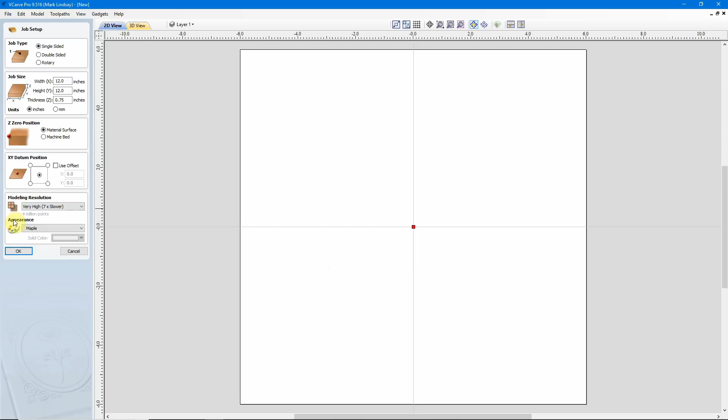And we'll get started. So once again, I'm going to be using models that are provided in the 3D Clipart that comes with VCarve and Aspire. This time I want to combine a couple of models. So we'll go up here to our Clipart folder, and again I'm going to look for a dome/dish.

Except this time I think I want one with a flat bottom. So I'm going to choose this one here, this circle, and again to put it in the center of my material out here, I'll just come over here and double click it.

Okay, so when you're combining models, it's best to get the first model, the model that's going to be on the bottom, set and ready to go first. Then we can come back and add more models to our project out here.

So with my model already in move and transform mode out here in the center of my material, let's go ahead and resize it. Again, I want about a 10-inch diameter circle out here.

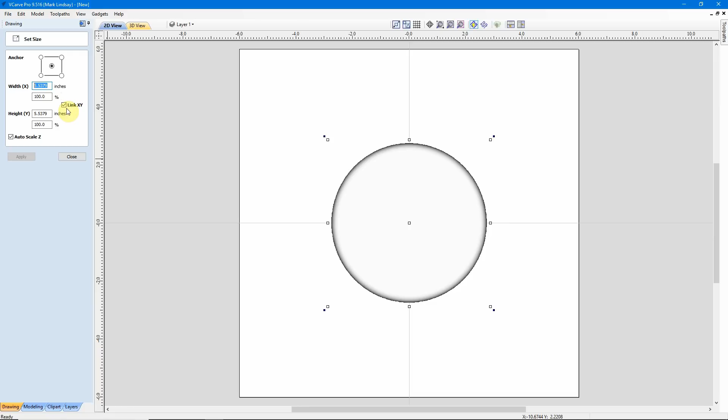So I'll make sure I have link XY checked here. Then I can choose either one, it doesn't matter because it's linked. I'll select my width in X and I'll enter 10.0. Click apply, and our model resizes out here. We can go ahead and close that.

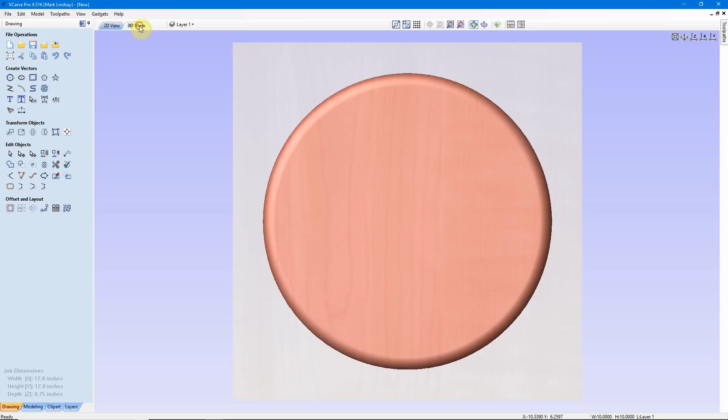Now again, if we come over here in the 3D view and take a look, we have a dome. So we need to go back and change that.

So we'll go over here into my 2D view, making sure the model is selected. We'll come down here to the modeling tab. And again, I have flat round circle, and the combine mode you see is set upwards. We need to change that.

So I can double click on the name of this model down here, or I can come up and click on this wrench. Either one will do. And that gives me the properties of this model. So what we're going to do here is we're going to set this as our base. I'll go ahead and select the subtract combine, and if you notice, it turned almost all of the model black out here.

Before it was white and just black around the edges, and you see the gradient here. It starts out black and then comes up lighter and lighter until it gets to white. That is showing you the black is the deepest cut it's going to make. The white is the shallowest cut. Well, when we change that over to subtraction instead of addition, it does just the opposite. We have black here, meaning this is going to be the deepest part of the cut, and we go gradually lighter until we get out here, and this will be the shallowest edge of the cut.

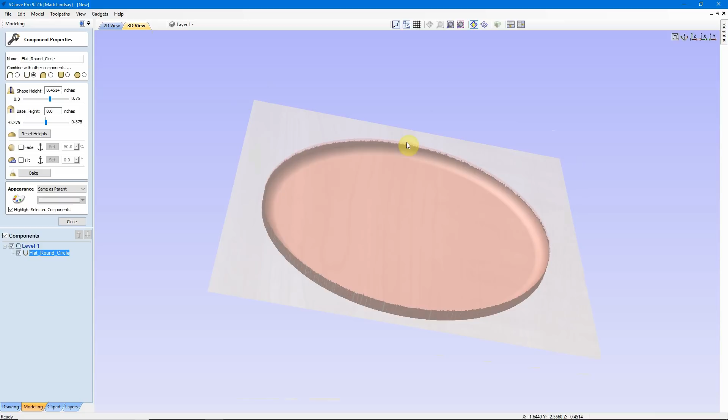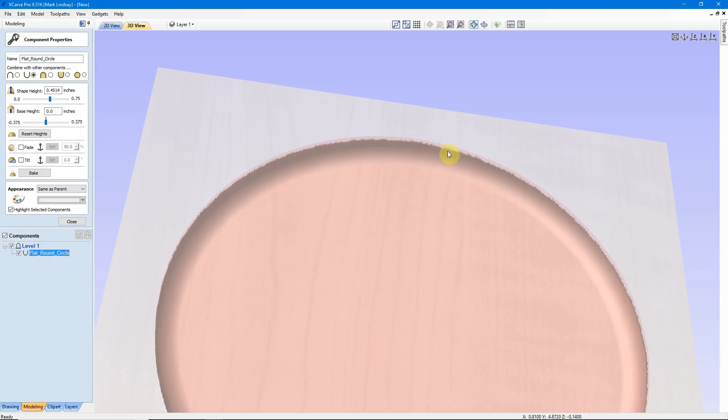Now, I had a couple of questions based on the last video asking about the zero plane. If we zoom in here on our model, take a look, we can see we've got some pretty rough edges in the model itself. If we don't use a zero plane, those rough edges will be carved into the material. If you've been having problems with chip out or big lines around your models, that could be a factor. The zero plane eliminates that. But I'll get into that a little further in a minute.

As we have it set right now, if we look down here at the XYZ display, this model is going to cut 0.4514 deep. That's a little bit deep for me. I want to bring that down to about 3/8 of an inch. My material is 3/4 of an inch. I want to bring it down to about half of that depth.

So we'll go up here in the shape height and enter 0.375. You see it adjusted the model. We come here and look, it's a little bit shallower. I run my cursor out here and look down at my XYZ display and see it's now

carving 3/8 of an inch deep. We still have that roughness around the edge, but the zero plane will take care of that. Before we do a zero plane, we have a couple of other things we want to add to this project, so we can go ahead and close this. I'd like to give this as a wedding gift. So what we'll do is import another model right here into the center.

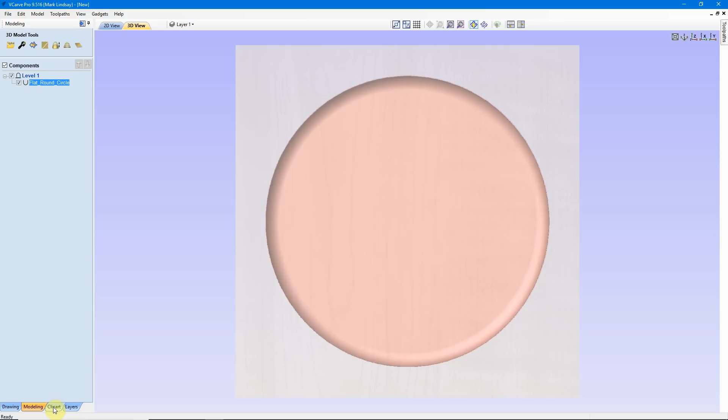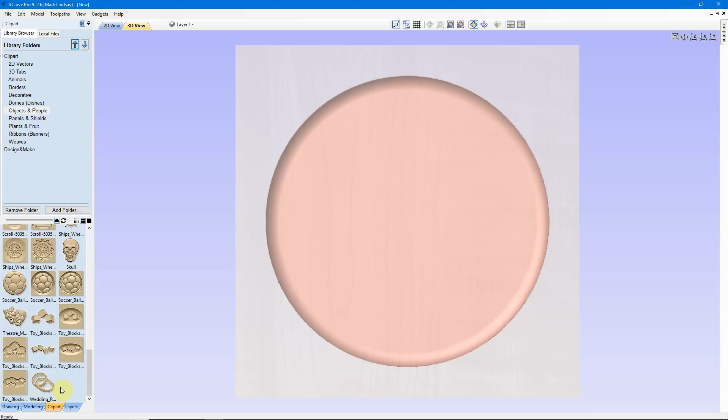So we'll go back to our Clipart, and I'm going to jump down here to Objects and People. We'll just scroll down the list of models till I come across the wedding rings, and I think that would look good carved into the center of this. So again, I'll double click to put those rings in the center.

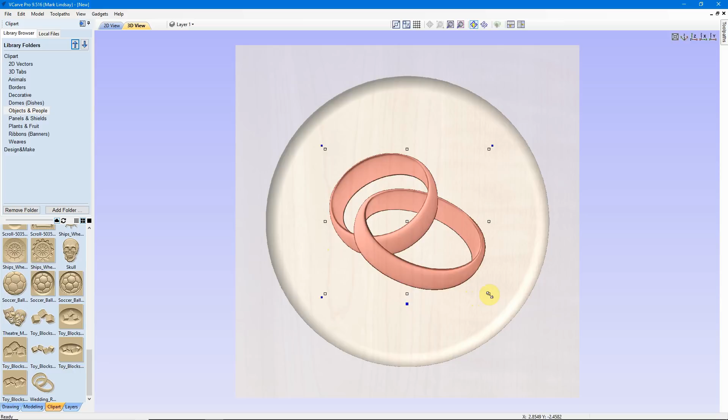If I'm on that, it may be a little bit small, so since we're automatically in move and transform mode, I'm going to bring my cursor over to one of these corner boxes and hold down Shift to lock that model in the center of my material. Just kind of drag it out a little bit, make it a little bigger here. I think that's about enough. I think that looks much better.

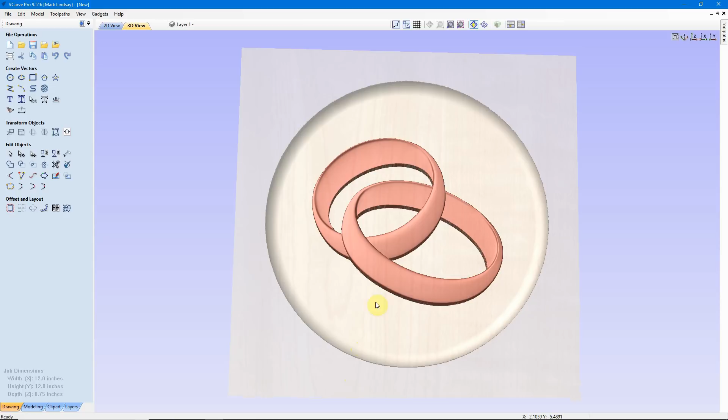So I'm finished with my modeling or Clipart tab. I can go back over here and we'll take a look and see what we've got. We can see here our 3D model for the dish sits below, carving into the top of this piece of material. But if we come up here and look at this in X or Y, I'll go ahead and do a straight on X shot. We can see that these wedding rings stand proud of the material.

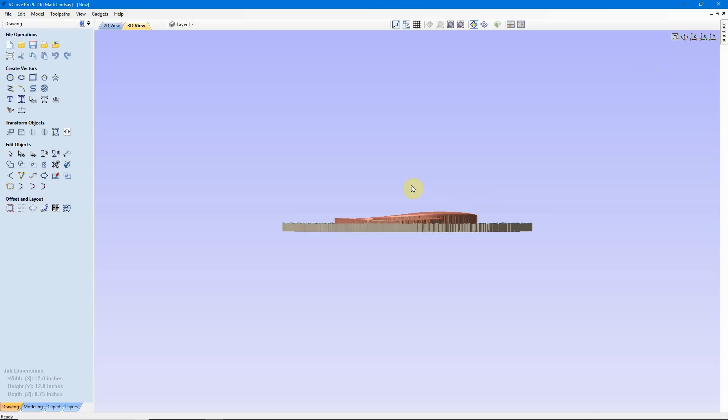That's not going to work at all. So we're going to need to change the properties on this model completely. With it selected, we'll go back into the modeling tab, and we see now on level 1 we have added the wedding rings along with the flat round circle. Let's open up the properties on the wedding rings by double clicking it. Now in this case we do want the combine mode to be addition.

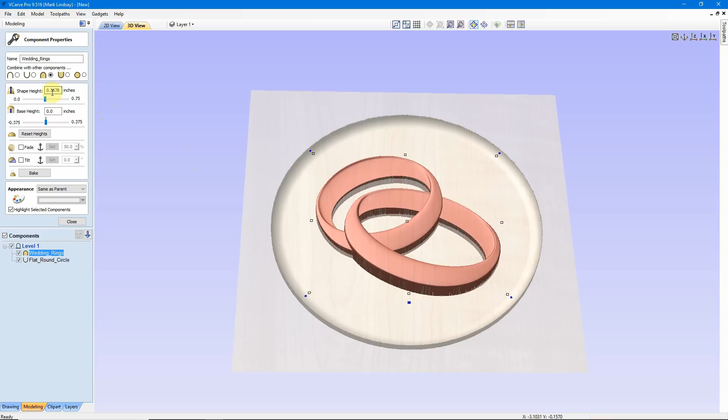We want these wedding rings to stand proud of our dish, we just don't want them to stand that proud. So we can see right here that we have a shape height of 0.3678. That is from this edge here—let me zoom in a bit—from this edge here where the straight vertical meets the top of the model, that's how thick this is. This straight edge and everything below it is the base of the model, and this is the relief of the model.

So the shape height is this portion up here above. That's a little bit much. Our base height is a little bit much as well. What I'm going to do is reduce this a little bit. Let's take it down to about 1/8 of an inch and see how that looks. So we'll take 1, 2, 5, and let it update. That brings that down quite a bit,

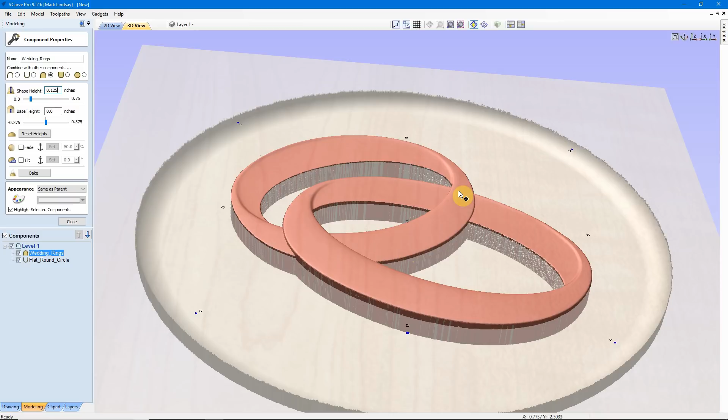but our base is still a little bit high. I don't want this tall base standing up before we get to the actual contour of the model. I want to get rid of quite a bit of that. So I have two ways of doing that. One, I can enter a number up here in base height if I know it, or I can adjust the slider. Now, this slider moving to the right will give us positive numbers, which will raise the model up, but I don't want to do that. So I'm going to have to go into negative numbers here and bring that base height down.

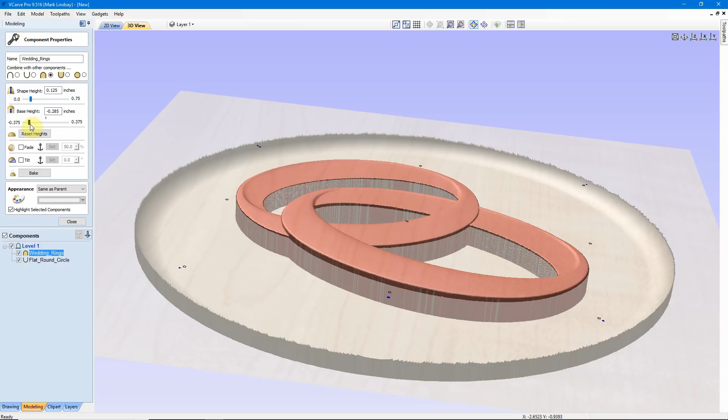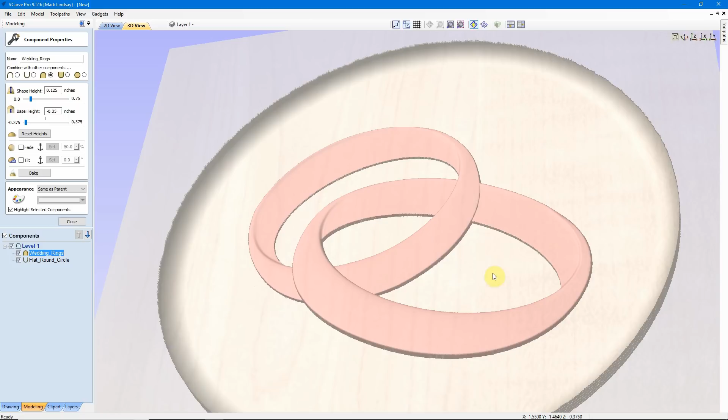So let's see what happens when we move it down to about 0.3. Take a look at that, and that brings it down some. It's now below the level of the surface of our model here, but I still have quite a bit of a ridge. So we've tried -0.3, let's try -0.35. Let it update, see what we get there. That's a... whoops, didn't mean to move it. Control Z. There, that's a little bit better. Let's see what happens if we take it all the way down to 0.375. Let it update.

Looking at it from this direction, we do have a little bit of a ridge here, but since this ring is supposed to be laying on top of this one, that actually doesn't look bad. The lowest ring, we still have some relief here, but not a huge amount. So I think that'll work.

We'll go ahead and reduce our base height to -0.375. I'll leave the shape height at 0.125. What all this means is the start of the contours of the model will start at the surface of the dish model, and the relief, the height of the model at its highest point, will be about 1/8 of an inch above.

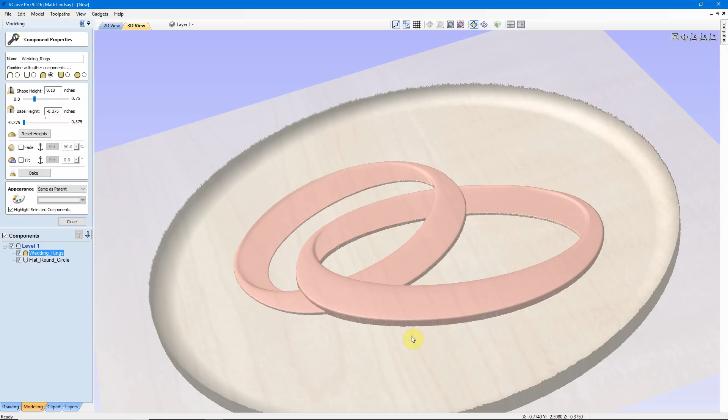Now, with this recess down inside this model, we can bring this up if we like and see how that looks. And I don't know that I like that. I don't know, just personal taste. I think I prefer it back down at 1/8 of an inch. So I'm going to use that just for me.

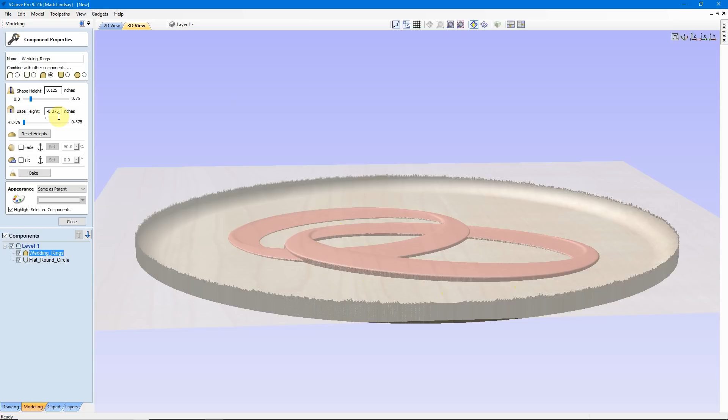Again, this is one of those subjective things. If you want more depth, more contour on the rings, then by all means adjust that shape height right here. I'll go ahead and close this.

Now let's take a look at what we have here in 3D, and I'll give you a brief recap. What we did was we imported a dome/dish. We got into the properties. We set it as a dish to carve down into the material.

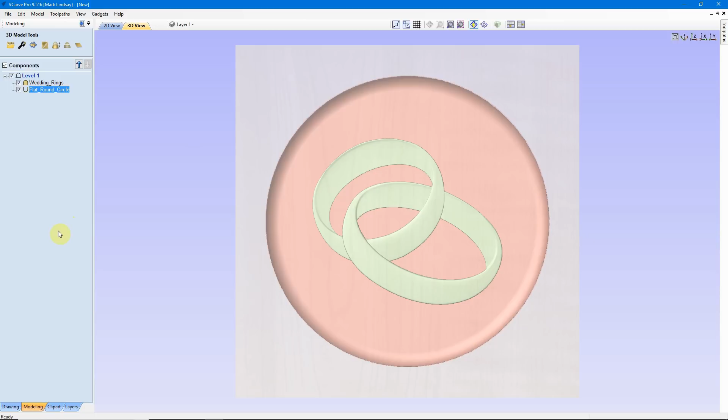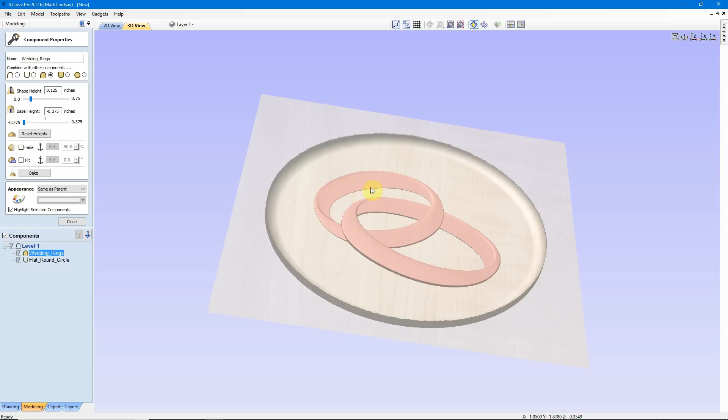Then we imported the wedding rings. We adjusted our base height to where the relief of the model starts right here at the level of this dish. Then we adjusted the relief height to give us what we're looking for here - enough contour to make it stand out, but not so much that it looks like it's projecting out from the wall. So we can go ahead and close this.

Before I go any further, I'm going to go ahead and calculate a toolpath to show you what this looks like without a zero plane, because again, we still have this roughness here that came modeled in with this dish model.

So what I'll do is I'll come over here and just do a 3D finishing toolpath. I'm going to do it real quick with a 1/4 inch ball nose bit. Do the model boundary, calculate, and I'm just doing this to be fast so that we don't spend a lot of time waiting for this to calculate.

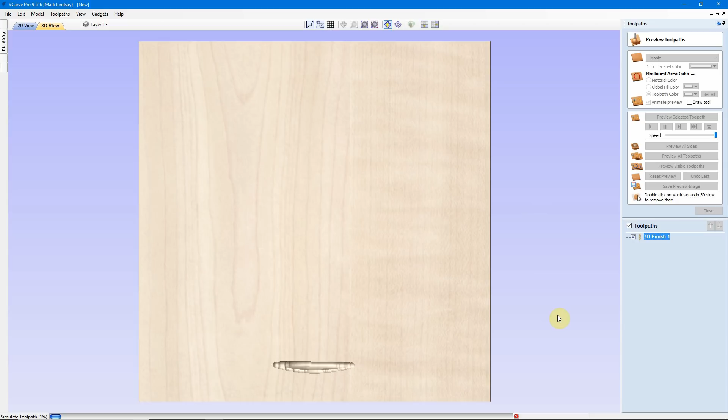And I'll preview that toolpath. And already, even though it's just beginning, you can see what I mean about the roughness of that model and how it's going to carve along the edges. And that's simply because VCarve does not have a reference as to where this model is supposed to start.

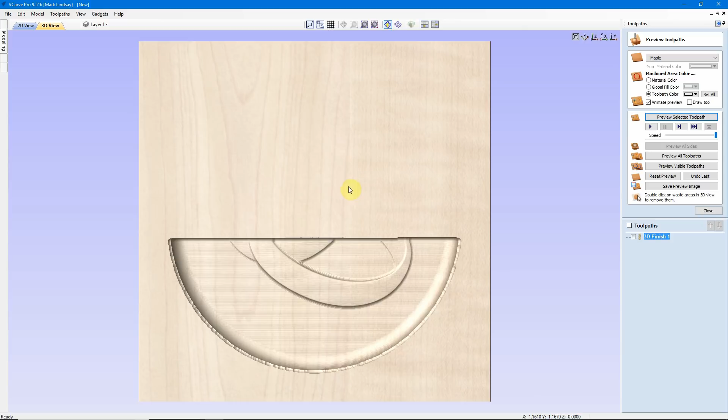Now, in a situation like this where I don't want to continue watching the preview, I can stop the preview by coming down here to the bottom of my screen and hitting this red X right here. That stops the preview. I don't have to wait for this to go ahead and finish to do what I want to do next.

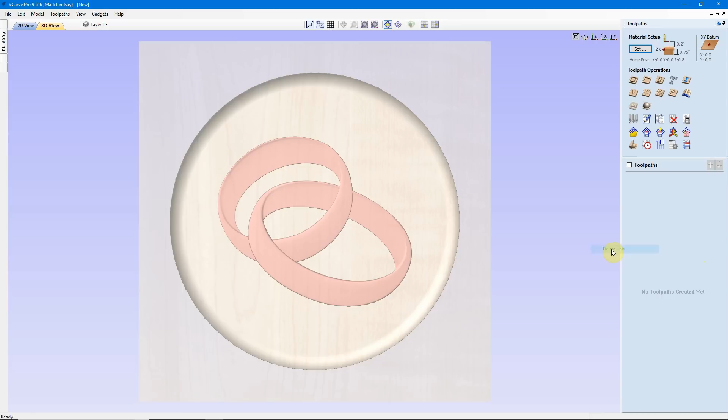I don't like this. I need to get rid of this. So what I'll do is reset my preview, close my preview window, and I'm going to delete that toolpath entirely by right-clicking, selecting delete, and then selecting delete this. That eliminates that toolpath.

So, as you've guessed, we still have some work to do out here. Looking at my 2D view now, I have both models placed exactly where I want them. But what I want to do now is add that zero plane. So we'll add the zero plane.

We don't see any difference here, but if we go into the 3D view, now is when we do see the difference. What adding that zero plane did was fill in where the model stops. It filled it into the surface of our material.

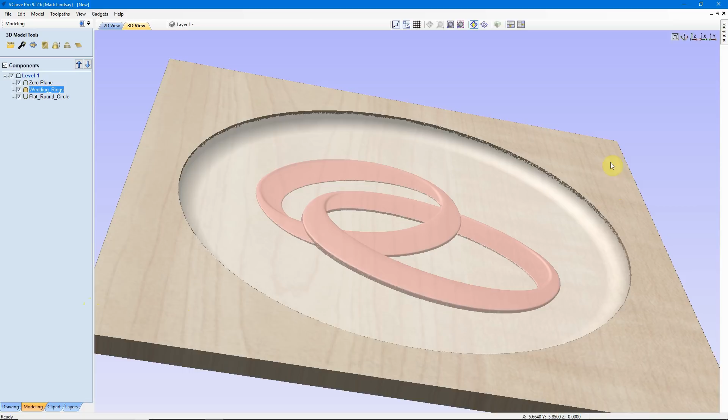Now, one side effect of this, if you noticed in the first video in this series, is it makes the entire surface our 3D model. And I'll explain that a little bit further when we get into calculating toolpaths for this.

What we have now is our zero plane, our wedding rings, and our flat round circle. They're all placed, and we could carve this as is. But I think we need something, I think we need a little bit more.

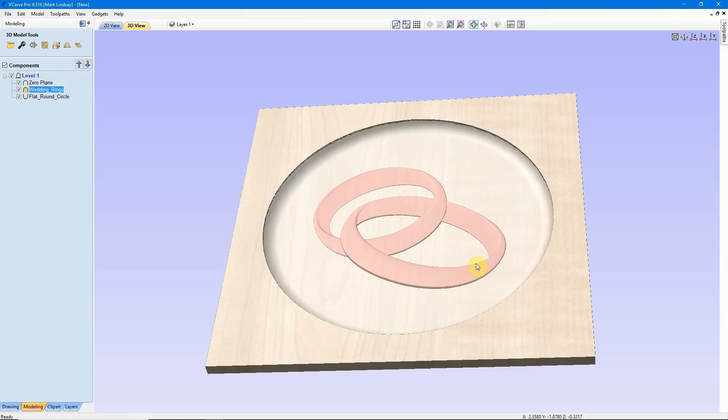So, go ahead and go back to a straight Z view. I'll go back into my 2D view, and I'll go back into my drawing tab. Now I'm going to click off out here just to deselect everything, and you see how everything kind of went grayish. I want to put a vector around this dish to base an offset on.

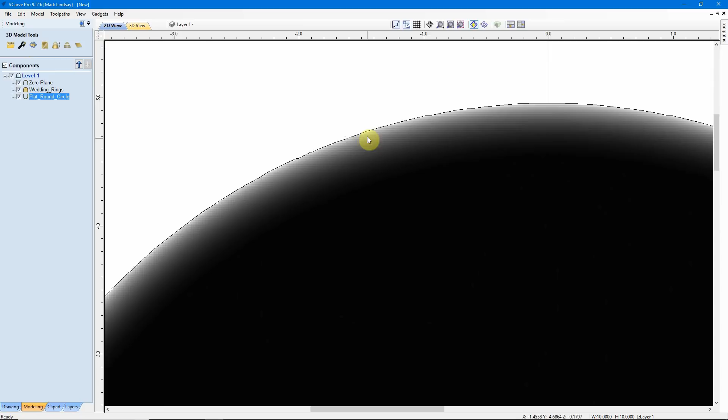I want to offset out away from this model to give me a vector to cut as a profile. There's a simple way of doing this. I'll select this model, go back over into my modeling tab, and come up here to the third icon on the left, which is create a vector boundary around the selected component. I'll click that icon, and if we zoom in here, we now see there is a vector around the model that I can select. I can go back over to my drawing tab, and if I wanted to just cut flush around the model, that's the vector I would use for my profile toolpath.

Well, I want a little bit of a lip out here. I want a rim. I don't want that sharp jagged edge where that dish would end if I just cut right here along this vector. So, with that vector selected, I'm going to offset. I'll come over here and click offset.

I want to offset it outwards, and I want a rim out here. Let's go with a 3/8 of an inch wide rim. So I'll offset outwards 0.375. I don't have any sharp offset corners to worry about, so it doesn't matter if there's a check mark in there or not. I don't want to delete the original, and I don't want to select the new vector, I just want to create the new vector. There it is when I click offset. There's our new vector.

Now I'll close that. Now I want to do something else. I want to put some text in here - the names of the bride and groom up here and the date of their wedding down here. And I want it to curve, I want the text to follow a curve. Probably the first thing I want to do is create the curves I want the text to follow, simply because it'll be easier without the text here in the way.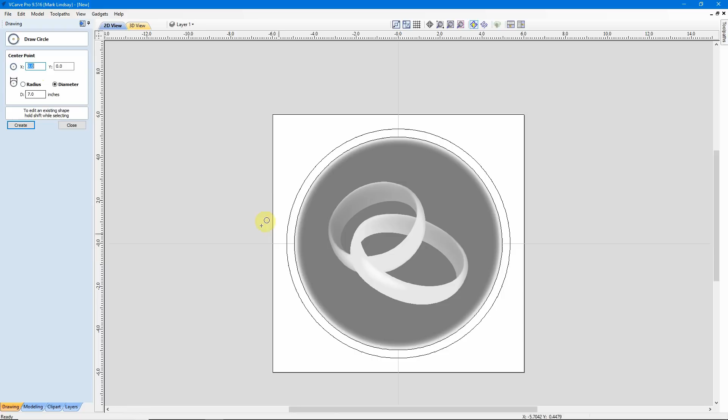So, without selecting anything, I'll click off and come over here under Create Vectors to draw a circle. Now I want the center point of that circle to be at my x0, y0. And I already have a diameter of 7 inches here on a 10-inch dish. Let's create it and see what it looks like. Okay, that kind of blends in there.

Let's make that a little bit bigger. So I will hit Control Z to undo that circle, and we'll make it 7.5 inches in diameter. Click Create. And now my circle doesn't lay over the rings, either one of them. So I think I'll go with that.

I'll close that. Now I want to split this circle into 2 arcs, one going this way, one going this way. So I'll click on the circle, and then go into node editing mode by typing the letter N on my keyboard. That takes us into node editing, and we see that this circle is made up of 4 arcs.

I'm going to bring my cursor over this point right here, right click, and select Cut Vector. But before I do, we look over here and see the letter C - that's the keyboard shortcut to cut vectors. So I'll select this one now since I have the menu open, and we'll see the start point change to that point right there. Remember, green is the start point, black is just any other point.

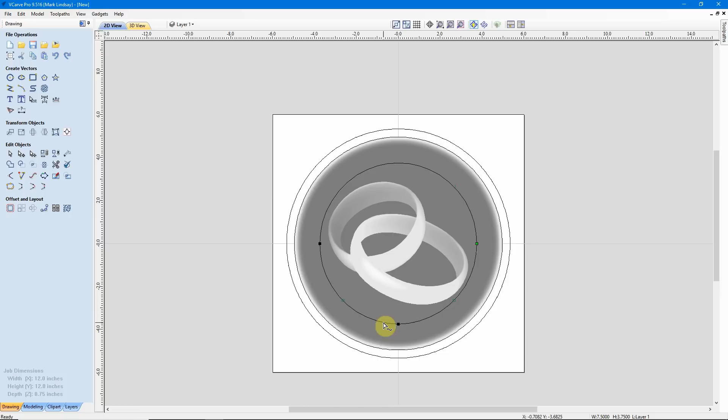Now I want to cut the vector over here, and since I know the keyboard shortcut, I can just put my cursor over that point, and when it turns into the crosshairs, type the letter C, and the vector is cut. So now I have these 3 points showing me this arc up here. I can come down here and click on this, and I have these 3 points showing me that this arc is separate from this one. So I now have 2 open vectors. Click off to deselect, right click to come out of node editing mode.

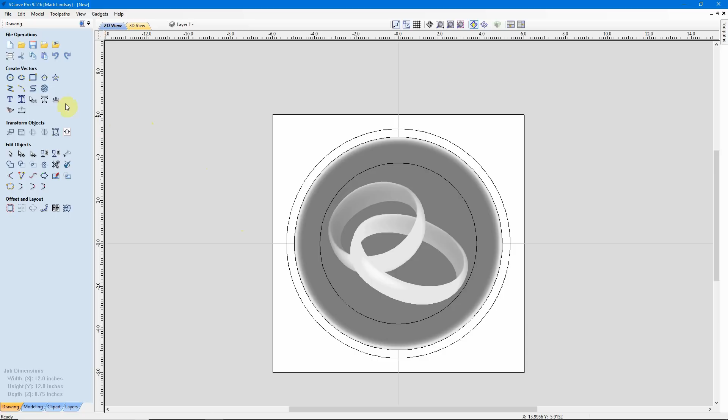Now I'm ready to add some text. So we'll go up here to my text window and click on that icon. Give it a second to load the fonts. I'm going to go a little traditional, I'm going to stick with my Times New Roman. I'll figure out my text height in a minute. It doesn't really matter where out here it's going to place the text because I'm going to be moving it.

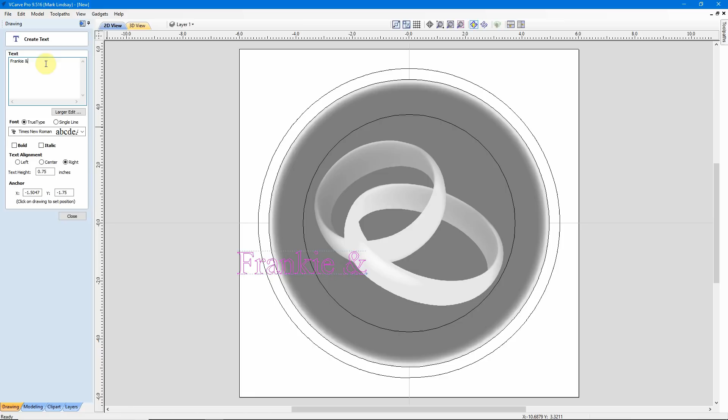So we'll go ahead and come up here and enter the names, which are Frankie and Johnny. The right people will get that. And I'll close it.

Now I can click again my text to bring it into move and transform mode, and I'm going to grab it by the center block here and move it up and line that center block. You see how it snaps to the middle, and I want to put it right there on that intersection. So my text is now snapped right there to the center of that arc.

So now I can click off. Then again select my text, hold down Shift and select this arc. Select the arc last. Then I'll come over here under Create Vectors to this icon right here, wrap text along a curve. I'll click that icon and we have a couple of problems.

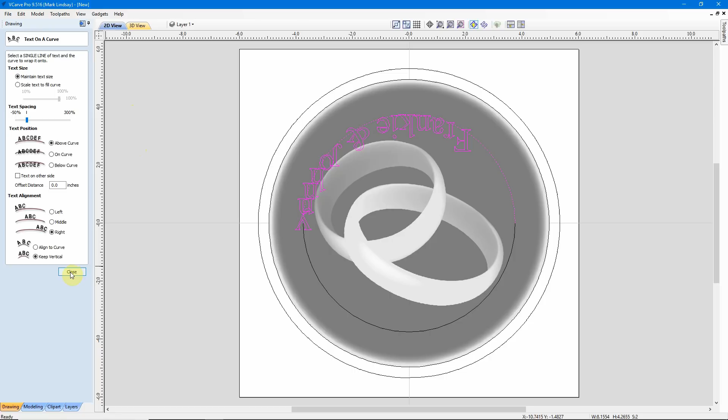So let me close that, do Control Z to undo that, and I'll show you why this flipped upside down and reversed. That has to do with the vector start point of this arc.

With that arc selected, again I'll type N on my keyboard to go into node editing, and we see the vector start point is over here. We read and write left to right, not right to left. So I'll want my start point to be over here. The text is going to follow this arc based on the start point. So I'll convert this, right click, make start point.

That changes green. While I have this open, let's check the bottom one. It's the same way. So I'll go ahead and hover over this, right click, make start point. So now both of these arcs are running from left to right.

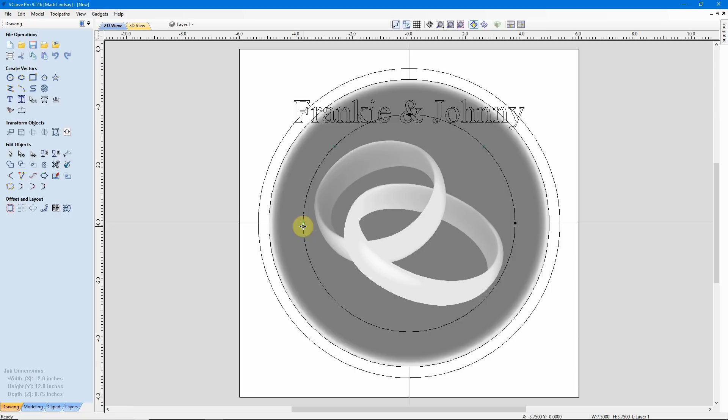Click off, and then right click to get out of node editing mode. Now I can select my text, hold down Shift, select the arc, come back over here to apply text on a curve, click it, and we stay oriented the correct way.

Now we have some decisions to make here. I don't really like how this is sitting. So I'll go ahead and maintain the text size, but first of all we need to do some placing here. I want the text to be aligned to the center of that arc. So I'll click middle, and that places it there.

I don't really like the letters staying vertical, so I'll come down here and click Align to Curve. That adjusts that much nicer.

It's sitting on top of this vector, on top of our arc. Now we can position it above the curve where it is now, we can place it on the curve, or we can place it below the curve. Let's take a look at what happens if we place it on the curve. And that's going to put some of my lettering down here in the ring, and I don't want that. So let's go above the curve.

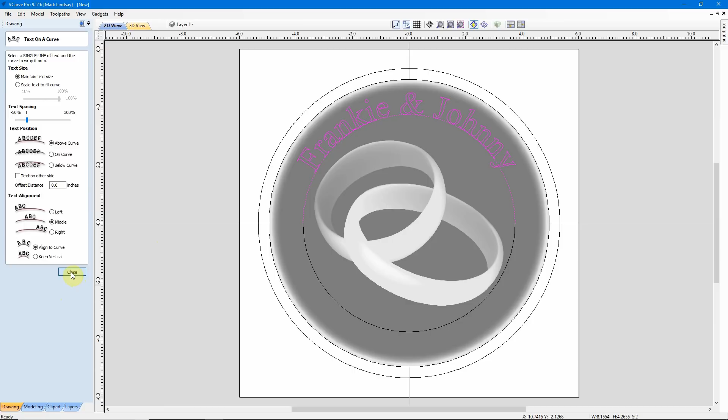Maybe we'll revisit this, maybe we won't. But we're going to leave that as is right now until we get the date here, then we can make adjustments. We'll close that, click off to deselect.

Now I want to get the date entered down below, so I'll go back to my text window and I'll type March 21st, next year, 2020. That'll work. We got advance notice.

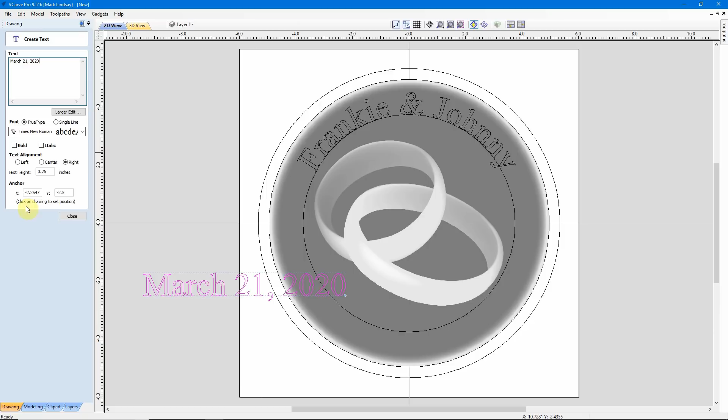Again, I'm going to leave all this alone because it doesn't really matter yet. We'll just close it. And then it's already selected, so I'll click it again to bring me into move and transform mode. Grab the center of my text, drag it down here and snap it to that intersection.

Now I can click off, select the text, hold down Shift, select the arc, and it's important to do it in that order because the apply text to a curve applies the text to the last curve you click, the last vector you select. So we'll apply text to a curve, and again we have to go back through and make those adjustments.

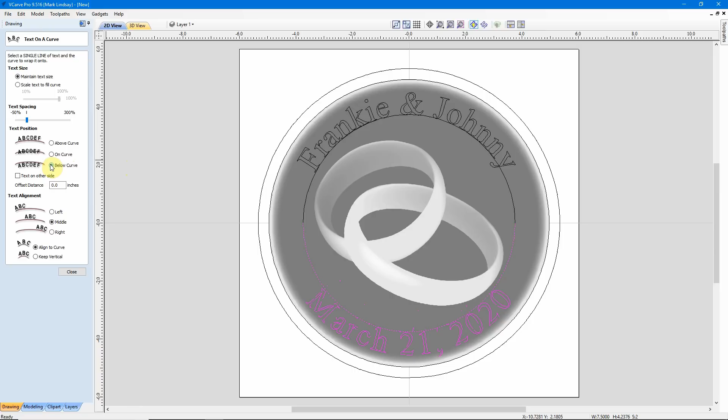We want to align the text to the center of that arc. I want to align it to the curve, but this one is placed so far up there we are into the rings way too much. Let's look at below the curve, and that brings it out here quite a bit. We're kind of getting into a little bit of the slope that may be too much, but we'll take a look at it and see what it looks like.

I certainly don't want to do it on the curve because that's going to engrave again in those rings. So we'll look at below the curve. We'll go ahead and close, deselect everything.

With our text placed, we no longer need these two vectors here. So we can go ahead and select them both, delete. Now we're free to adjust these should we want to.

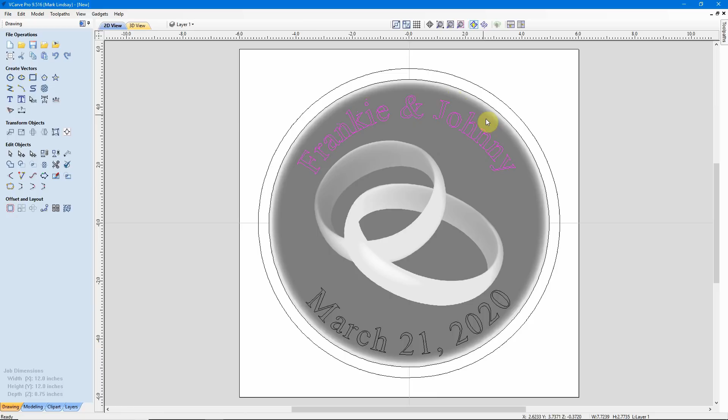If I want to move these down just slightly, I can just select them and then using my cursor down button on the keyboard, kind of nudge it a little bit to bring it out of our 3D carve area up here. And it's the same thing with this. I can select it and using the cursor up button on my keyboard, I can nudge it up just slightly.

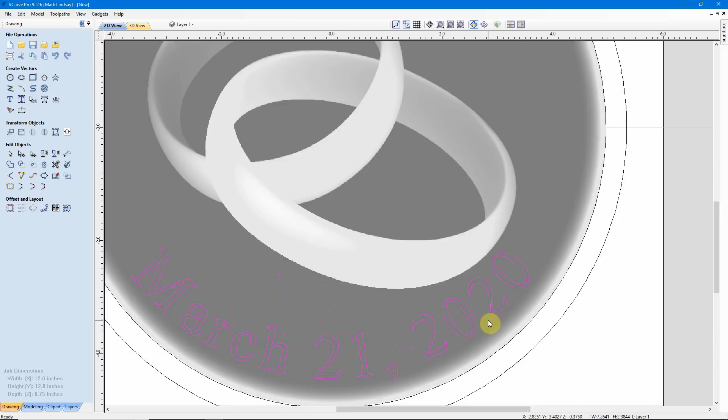I think that may be a little much, so let me zoom in a little bit. Yeah, I think that'll work. I'll go ahead and leave it at that.

Click off to deselect everything. Now we need to take the time to go back and look at our text and see if we need to make any more adjustments. As I look at this, I think the N and the K are just a little bit too close together, and when we try to carve this, they're going to run into one another. So I can adjust the spacing by coming over here to Edit Text Spacing and Curve.

Click on that icon, come back over here between the N and the K. If you look at my cursor now, you see a V with an arrow, then an arrow, then an A. You see which way those arrows are pointing. If I click now, that's going to move those two letters together. If I hold down Shift, you see the arrows change direction. I can click between these two letters to return it to where it was, then click once more to kind of spread them apart a little bit.

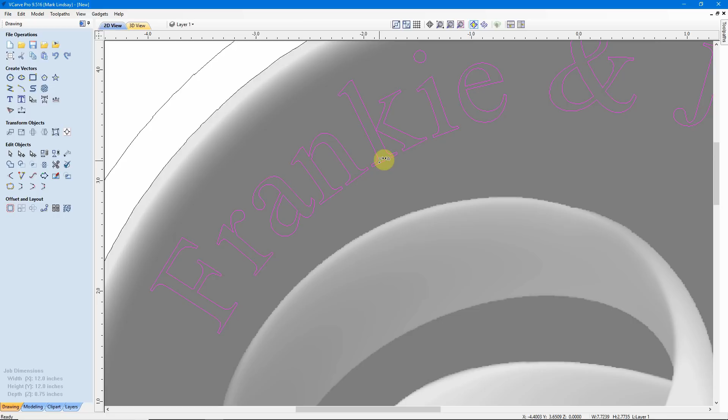I think that will work, that's far enough. This might get a little bit further apart. We'll come back over here and take a look, and these two Ns are a little close together. So I'll hold down Shift, click, come between the N and the H, hold down Shift, click. That separates those letters just enough that the feet here are not going to run into one another, but it all looks like the same word still.

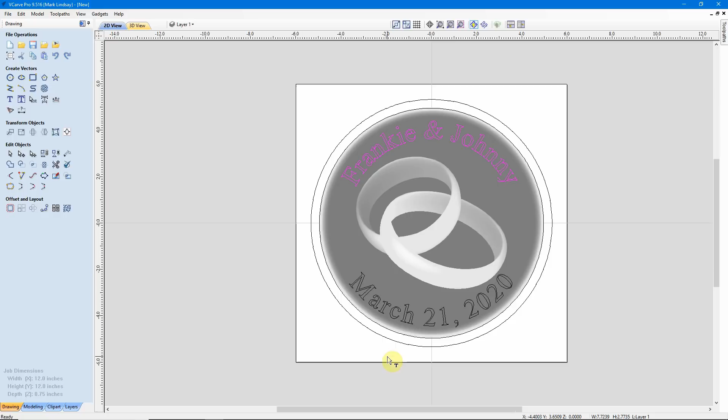So we're good there. Let's take a look down here. We've got plenty of spacing up here between our letters, we're just fine, so I'm not going to bother with that at all. To get out of this mode and back into selection, I'll come over here under Edit Objects to this first icon, go back into selection mode, and that gives me my plain arrow.

So now we're ready to start calculating toolpaths. We've got a pretty complex design here. We've got our dome, which we changed over to a dish. We have the rings that are going to be left in relief, carved on the bottom of that dish. We've got text to apply to that dish. Then we have our profile out here so we can cut it free of the rest of our material. So let's start calculating some toolpaths.

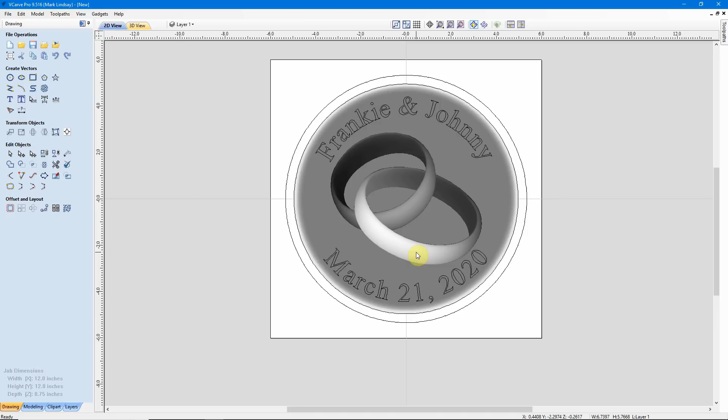The first thing I'm going to do is select the rings, hold down Shift, select the dish. Go over here to our Toolpath tab, and again I'm going to use a roughing toolpath with a 1/4 inch ball nose.

I'm going to select the model boundary, and remember what's going to happen is it's going to change — that zero plane changes so the entire piece of material is now the model boundary. I'm not going to use a boundary offset for this, it's just not necessary. If I apply a boundary offset, it would make my ball nose run 1/4 inch past the edge of my material, and I don't need it to do that because I'm cutting it out.

I'm going to leave a machining allowance of 25 thousandths of an inch. I had a question on my previous video about why, on my roughing toolpath, did the Z come down and just cut to a certain level, drop a little more, cut to a certain level, drop a little more, and cut to a certain level. That's because I was using the Z level roughing strategy.

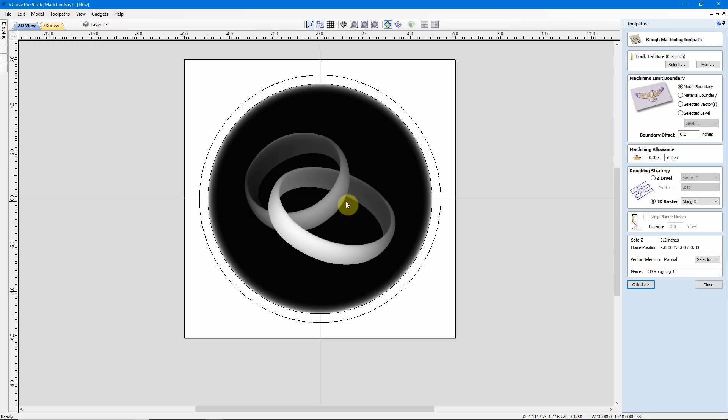The choice between 3D raster and Z level is your choice to make. As I demonstrated in the previous video, the Z level roughing strategy — the bit will drop down to a certain point, machine away the entire area, leaving only the areas behind that the finishing toolpath will clean up. Then drop to the next level, do the same. Drop to the next level, do the same. With 3D raster, the Z will plunge down as deep as it needs on each pass to leave that 25 thousandths machining allowance.

If you have a long enough cutting area on your bit, 3D raster may help. If you don't, use Z level. We're going to come on down here and call this 3D Roughing 1. We'll just leave that name. Now calculate.

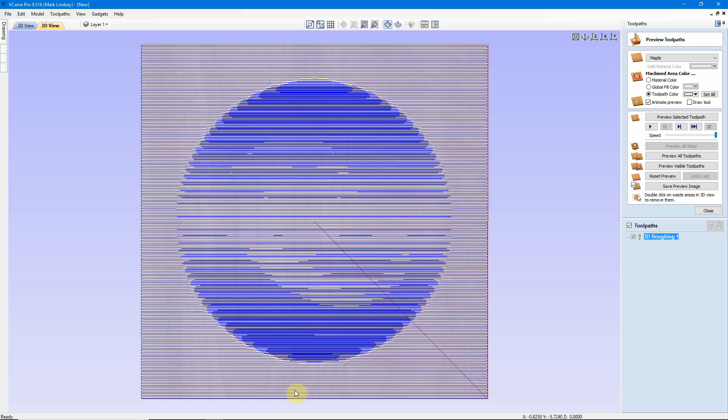Because I'm using that lower resolution, it doesn't take as long. As you can see, the zero plane turned the entire piece of material into part of the 3D model. So we'll go ahead and preview this toolpath. We begin to see the rings show up.

You see my step over is pretty wide, which leaves all of those ridges. Most of them will be eliminated with the finishing toolpath.

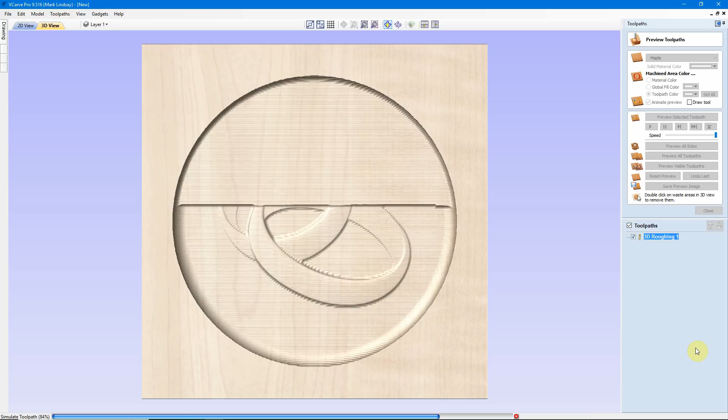The number of passes it's going to take to rough out the entire model is totally dependent on the pass depth that you have set for the bit. You just saw this took 2 passes to clean this out. That's because the pass depth for that bit was not enough to clean out the 0.35 inches that it took to carve this whole thing out. So we have it roughed out.

We'll close our preview and go straight over to 3D finishing. Now I'm going to run this one with an 1/8 inch end mill, and I'm going to look at my step over. My step over is at 40%.

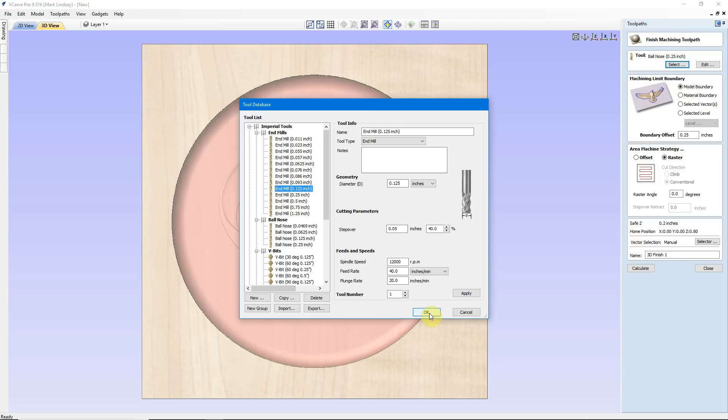I'm going to leave that here in this window, click OK, but immediately go over to Edit, and I'm going to select, enter 9.0%. The reason I want to do that here is because modifying the step over in the Edit window applies that modification to this toolpath only. When I calculate this toolpath, if I want to do something else with that bit, it will be at the previous step over of 40%. It doesn't modify the bit for good, only for this toolpath.

I'm not going to use a boundary offset, 0.0, and I'm going to use a raster strategy with a raster angle of 0, meaning the bit's going to go back and forth with the grain of my material. I'll go ahead and calculate, and this is going to take a little bit to do.

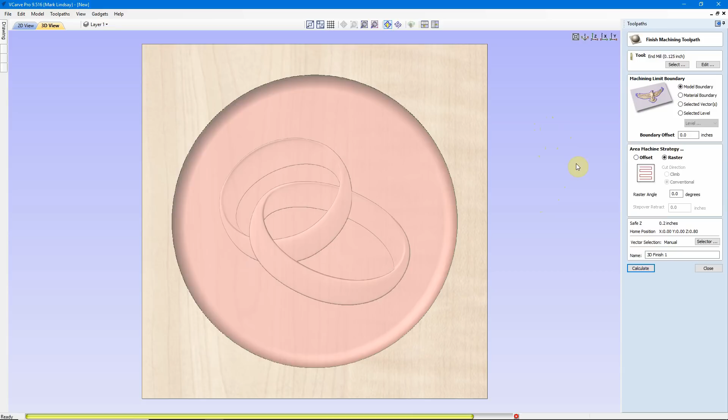We see how long this takes at this resolution. Imagine setting it to 50 times slower. There we go. Now you see how tight that is. That's 100% solid blue. You have to zoom in quite a bit to see the individual passes. At this resolution, you see why 3D carving takes so long.

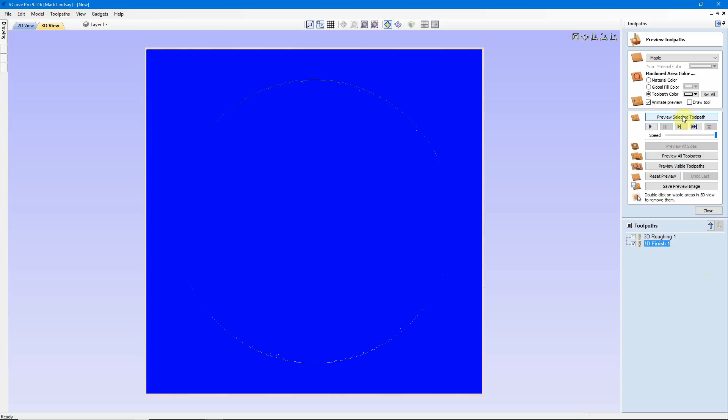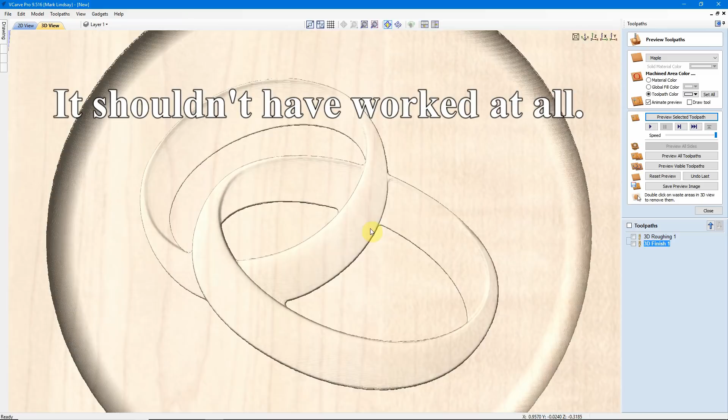So we'll go ahead and preview that toolpath. And there we go. Now we can zoom in and see it cleaned it up fairly well. Maybe a touch of sanding will be needed here and there, but it shouldn't be much at all. And that's at lower resolution.

I like that. I think I'm going to leave it that way. We have those taken care of. Now let's go back into our 2D view. Not only can we not see our text, we can't see anything but those two models. So we'll just click off out here. There's our text. I'll select this text here, hold down Shift, select this text here.

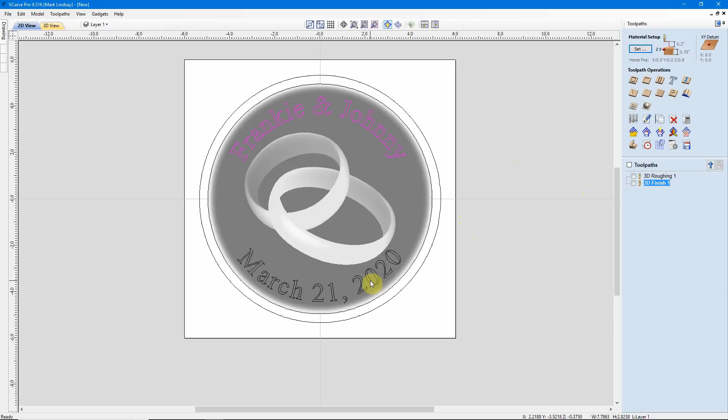And we'll do a VCarve toolpath. The starting depth will be 0. I'm not going to carve to a flat depth. I am going to try it with the 90-degree V-bit and see what it looks like. I can always come back and change it if I don't like it.

Here is the important setting to use, and that is this right down here: Project toolpath onto 3D model. What this does is it projects all of this text down to the bottom of this dish. And if the top of these letters happen to be in any of the carved areas, it will project it down into that carving as well.

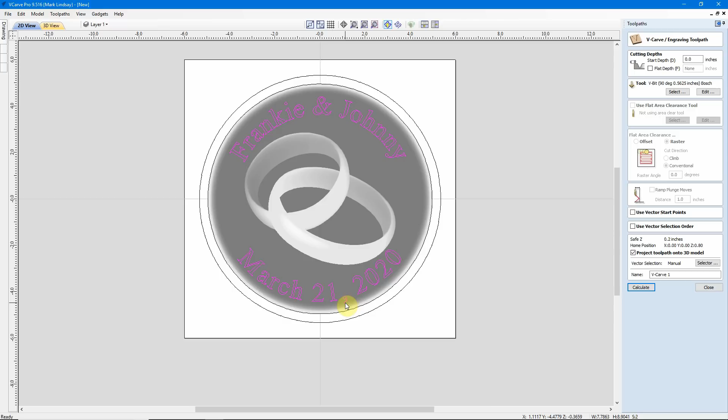Same thing down here, we have the comma. It's going to wrap into that dish a little bit, into that curve of the dish. This will project that toolpath down into the bottom of the model. We'll go ahead and calculate.

It's just a standard VCarve toolpath, so it calculates very quickly. I have it selected. I'm going to change my toolpath color to black so that you can see it. Then I'll preview that toolpath. There we go.

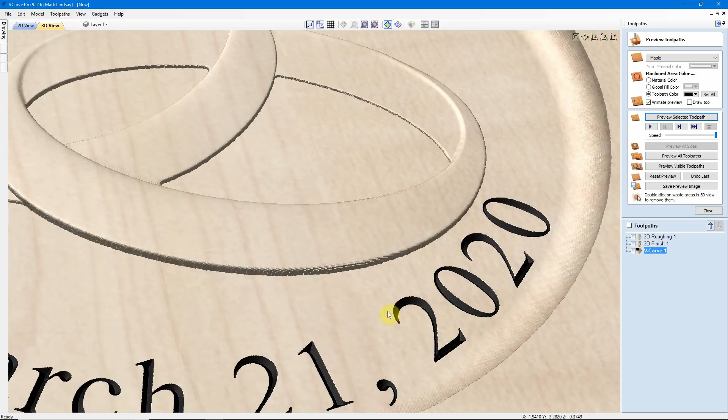If we zoom in, angle it here, drag it back up this way, we can see we got a nice clean carve. I don't think I need to change that to a different bit. I think the size we're using here is just fine.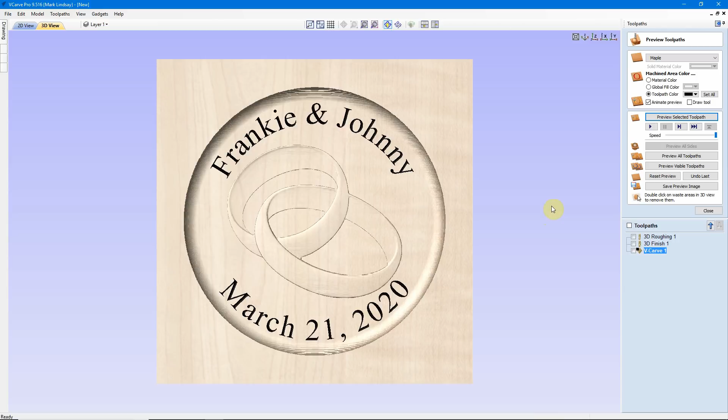So with that done, the last thing we have to do is close this, go into our 2D view, and select our outside profile. For this, we'll just select Profile Toolpath.

My start depth is going to be 0. I want to start carving at the surface. I want it to cut all the way through the material and a little bit beyond to make sure it does get all the way through. So for my cut depth, I'll eliminate everything in that box and type Z plus 0.005, meaning it's going to take the Z thickness I entered in Job Setup and add 0.005 of an inch to it. Then when I press the equals button on my keyboard, I get my cut depth.

The tool I'm going to use is a 1/4 inch end mill. That's okay, 6 passes, that's okay. I want it to cut to the outside of that vector. I am going to do a separate last pass with an allowance of 0.01. I'm not going to add tabs yet, and I'll show you why in a minute. I'm not going to ramp. I have no sharp corners to worry about. I'll go ahead and hit Calculate.

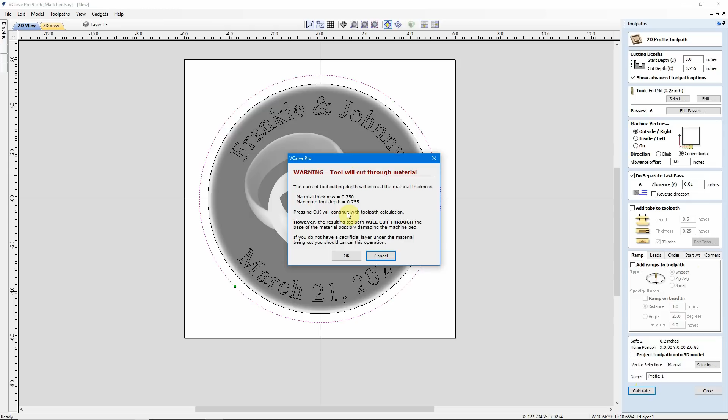You'll notice I'm not projecting the toolpath onto the 3D model. We're cutting outside of the model, so that's not necessary. I'll just calculate the toolpath. It's warning me that the tool will cut through the material — I want it to. Then we'll preview that toolpath.

Now I'm going to change things up, because I'm not really much for this light colored material. I'm going to change it to a medium color. There we go, that looks a little better. And here is the reason why I didn't put tabs in the toolpath.

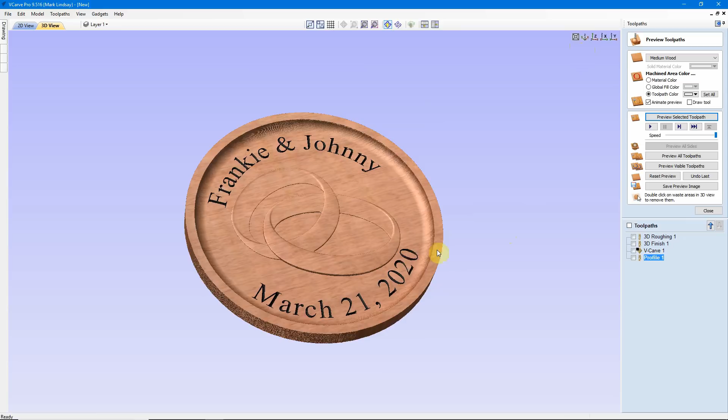I want to be able to double click that waste, then come up here and hit an ortho view of the model, which is the one between Z and full screen here. Just hit the ortho view to rock it back and zoom in a little bit.

Now I can come over here and save a preview image to send to a client or someone else who I need to get approval from on how this is going to look. Then click on Z, get a straight Z view, maybe zoom in a little more, click Save Preview Image and save another image.

When you click on this, it'll open a navigation window. You'll navigate to your folder and save it there. I don't want to save this, which is why I'm not doing that.

Now, the only problem with this is I need to modify the profile toolpath. Because I've done two things, if I do undo last, it's just going to put the material back. That's all well and good, but now I need to modify the profile toolpath to add tabs, and I need to reset the preview for everything. But that's okay, because I've got something else I need to do. I'll close the preview.

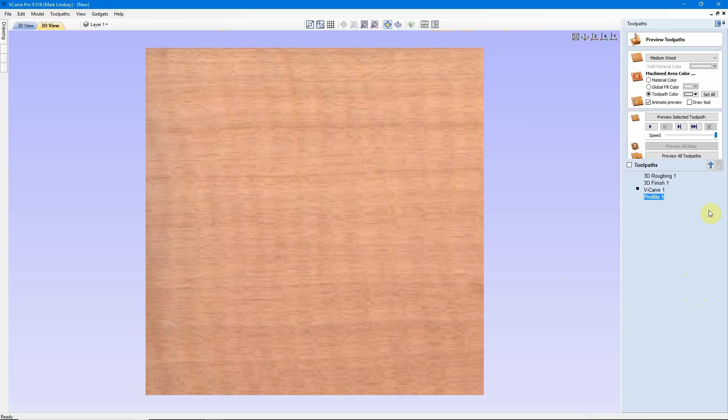When I go outside and work on my CNC machine, I set my X, Y, and Z zeros at the bottom left corner. Now, as I said, for layout purposes, my X, Y, and Z zero is right in the center. If we look back at the 2D view, my XY datum is the center of the material. Now's the time to change that.

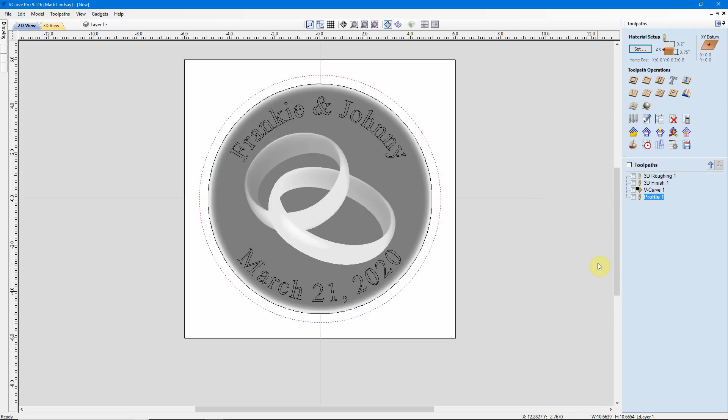I can either go back over to the drawing tab, go into Job Setup and change it, or I can go here to Set under Material Setup and change it right here. I'm not going to do this because I'm also going to change the modeling resolution.

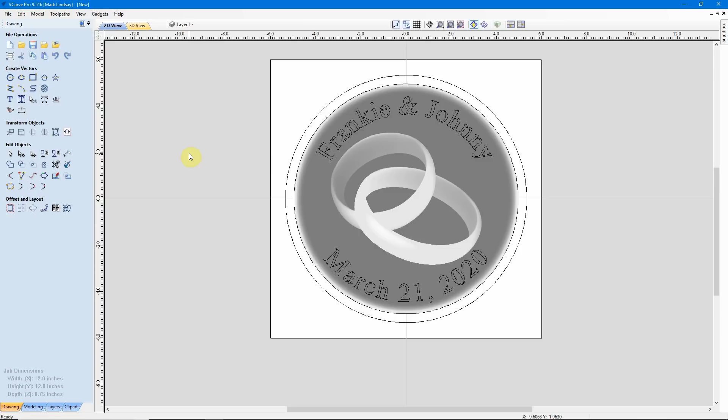So I'll go back to my drawing tab. We figured this out and modeled it up at 7 times slower, very high modeling resolution. I want to increase that resolution because I have a couple of models combined with some text here. So to get to those higher resolutions in Job Setup, I'm going to hold down Shift and click Job Setup.

Now I can change my XY datum to the bottom left, and we see there it did change. I can also change my modeling resolution — again, I'm going to choose 20 times slower, extremely high. I think that's more than sufficient. We do have some detail here, but not so much that it warrants going any higher than this. I'll click OK.

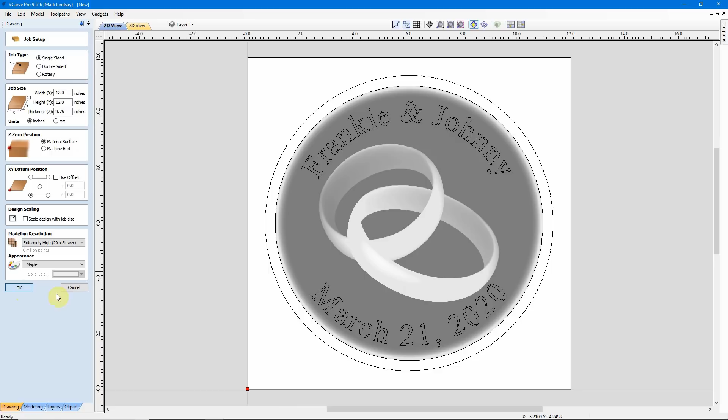Because I have made so many changes, my material setup values have changed. All toolpaths must be recalculated to ensure correct results. Would you like to recalculate now? Yes — so now it's going to go through and recalculate all of the toolpaths we had already applied.

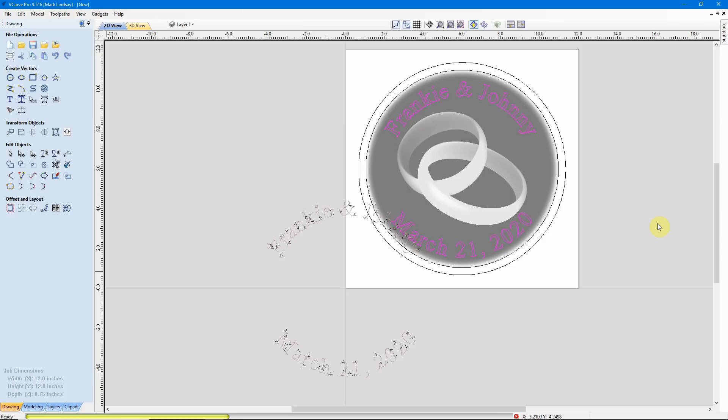It's now giving me the warning as it's recalculating the profile toolpath, warning me the tool will cut through the material. I want it to, so I click OK. All toolpaths successfully recalculated.

Center the project, then go back over to the Toolpaths tab and click on the preview. Make sure all my toolpaths are in the correct order, and they are. Profile is always the last toolpath on the list, the last thing you want to do.

We will go back into the Profile toolpath and add tabs, so double click on the Profile toolpath. I'm not going to change anything up here, I'm just going to add tabs. I'll use 3D tabs, 1/2 inch long, 1/4 inch thick, maybe a little thick, but that's okay.

I'll edit tabs and place one up here at the top center, one over here at about 3 o'clock, one down here at about 6, and one over here at about 9. That's good enough, they don't have to be spot on perfect.

I've got it held in place with some pretty good sized tabs. I can close this, calculate that toolpath. I know it's going to cut through the material. Click OK.

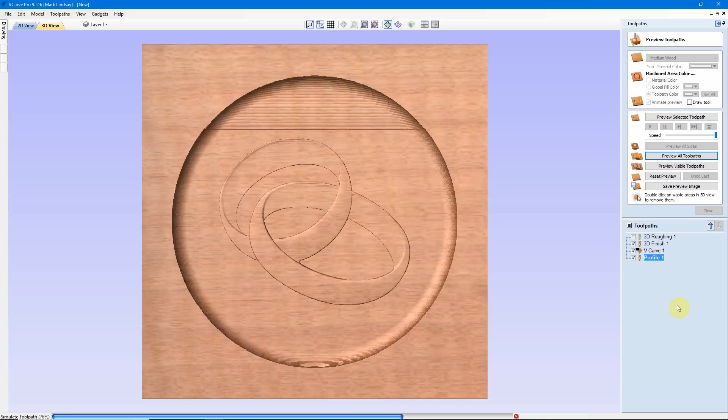Now I'll preview all toolpaths. Okay, and there's our project as it's finished.

Now again, you see I have the tabs here, and that's why I calculated that profile toolpath without tabs first, so I could save preview images without this scrap material. If I tried to double click to get rid of the waste, it would eliminate the entire model because this is still seen as one piece of material. There is no waste material to eliminate.

There's our model. We can save G-code, take it outside, and start cutting. A couple of pointers I'll give you before we close this video out.

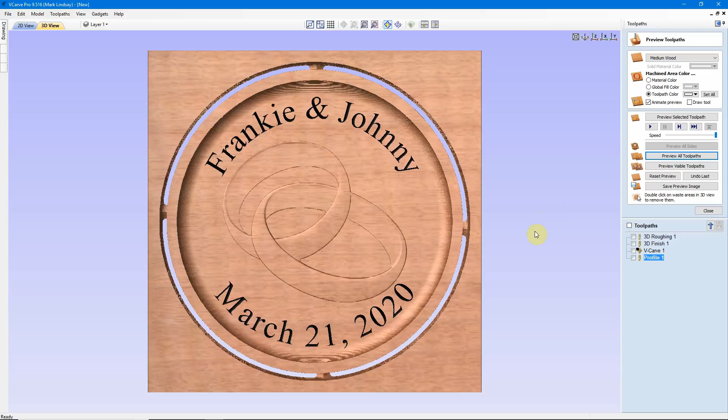When you first set up your material in Job Setup, try to use the least amount of material possible. What I mean is, you saw how using the zero plane converts the entire surface of this to part of the 3D model. The smaller this is, that'll still allow you to get your model out of it, obviously. The smaller this is, the less time it's going to take to machine that.

So try to size the material to fit the model. This is actually a little bit big, I probably could have made my material a half inch smaller, which would have saved me a few minutes of calculating time and might save a little bit of machining time.

If you have a machine big enough to mount a 4x8 sheet of material on it, don't enter a 4x8 sheet of material and then try to cut a 12x12 model. It will figure the entire sheet of material. So no matter how big the material is, try to size the material in job setup close to the size of your final model. That'll save you a lot of time, save you a lot of headache.

So to briefly recap what we have here, we imported two models from the Vectric Clipart library, converted one from a dome to a dish, then applied the second one allowing the relief to project upward from that dish. We added some text, applied that text to a curve, then calculated the toolpath projecting that text onto the 3D model.

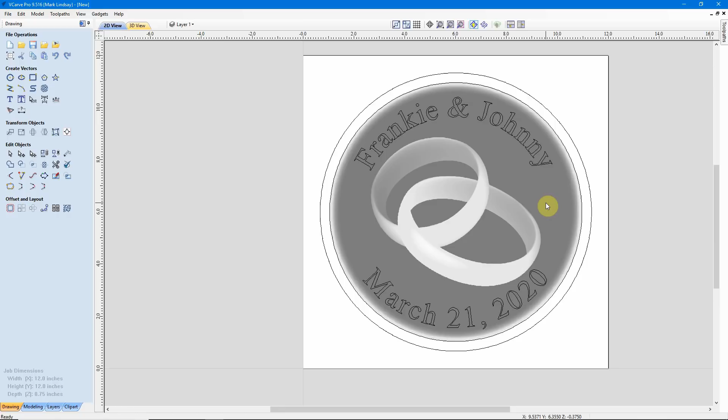We then calculated a toolpath without tabs, saved preview images, recalculated the toolpath to include tabs, then changed our XY datum point.

I know that was a lot to take in, and I do apologize for the length of this video, but we've gone from the very basic to some pretty advanced stuff here. In the next video, we'll get into importing a model, an STL file that was created in another software program.